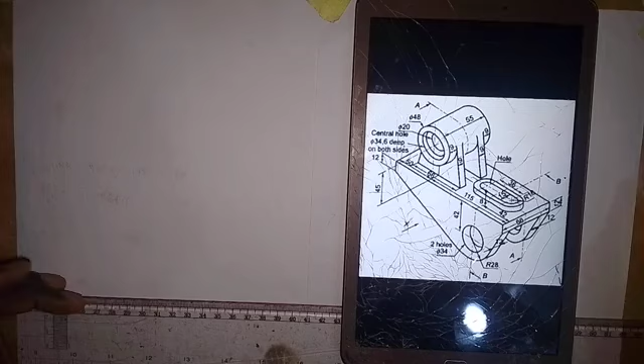Welcome to my channel. Here we are going to be working on this bracket as we draw the orthographic views in first angle projection with the front elevation in the direction of arrow X.

So after the orthographic views in first angle projection, we are going to have a video for the sectional view with cutting plane AA in this direction, as you can see it here. Then we also draw that of cutting plane BB in the direction of this cutting plane BB.

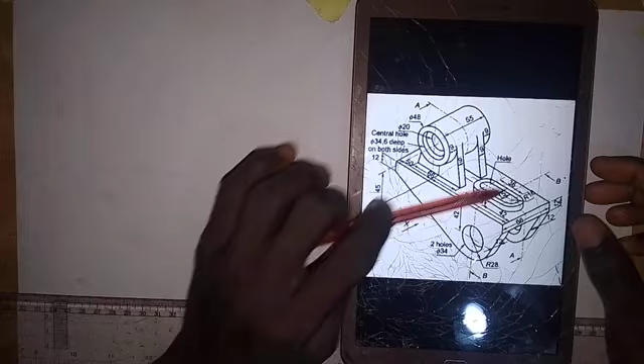So for the front elevation, the object is being viewed in the direction of arrow X. We are going to see this surface, then this surface, then the whole of this surface as we have it here.

So we are going to start with the construction of this surface. Let's talk about the dimensions that we have on this surface.

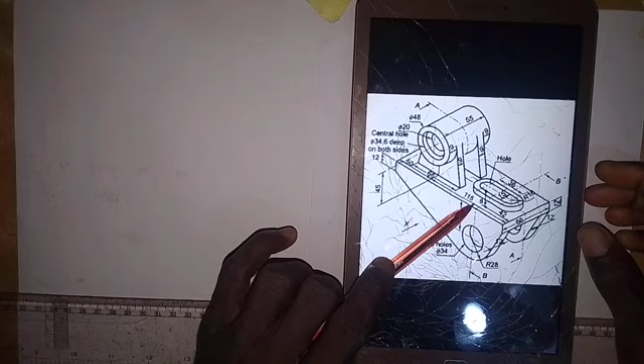We have that the distance from here to here is 12 millimeters, and the same applies to this, from here to here is 12 millimeters. Then we have that the distance from this point to this point is an addition of 50 plus 115 millimeters.

This 50 millimeters from here to this point is for us to locate the center of this part. Then we have to take a measurement of 115 from here to this end.

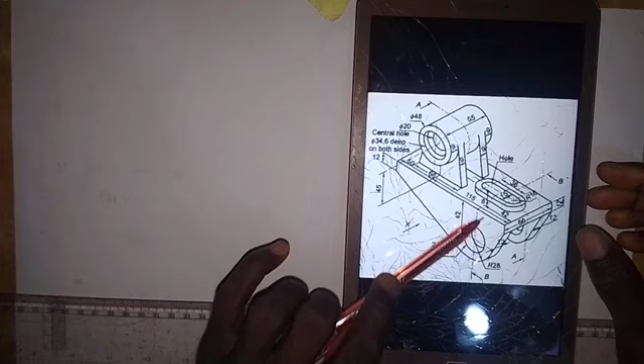We also have that for us to get the vertical center line of these circles here, we will take a measurement of 42 from this end to this point, and for the horizontal center line, we will take a measurement of 42 millimeters down.

The diameter of this circle here is 34 millimeters, while the radius of this arc is 28 millimeters. So that is where we are going to start from. We are going to construct this face first.

Let's start. The first thing that we are going to do is to draw this line up here. So we are going to draw the line first. That is the first thing that we are going to do.

I will come up like this, and then draw a horizontal line on this line, and then on the paper. Then I'm going to draw a short vertical line at this end here, a short vertical line like this.

Okay, then I will take a measurement of 50 millimeters. So this is 50 millimeters here.

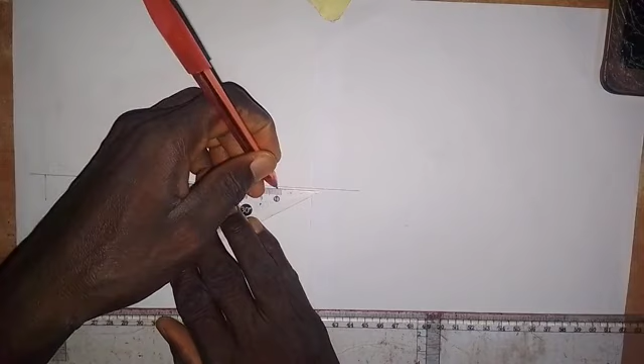Then from here I will take a measurement of 115 millimeters. So this is at 100 millimeters, then I need an additional 15 millimeters to this. So this is 15 millimeters, making 115 millimeters.

At this point also, I will draw a short vertical line at this point. So I'm going to take a measurement of 12 millimeters down, as we have the thickness there, as we see it in the diagram, to be 12 millimeters.

I will come to this end here and take a measurement of 12 millimeters down. So this is 12 millimeters here. So we have 12 millimeters.

Then the next thing that I'm going to do, as I said, is that for us to draw this circle, we need to take a measurement of 42 millimeters from this end to this point, and we take 42 millimeters down. That's how we can get that circle and the arc drawn.

So I'm going to take a measurement of 42 millimeters from this end, so 42 millimeters from this point. I will take 42 millimeters forward, so this is 42 millimeters.

Then I'm going to draw a vertical center line along this part. So I will draw a vertical center line down like this. Okay, so we have this.

Then I will take a measurement of 42 millimeters down on this vertical center line. So this is 42 millimeters. Then I'm going to draw a horizontal center line, so like this. Alright, so we have this now.

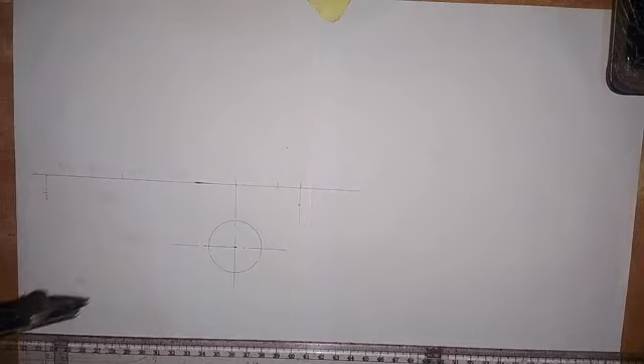So then for the arc, the radius of the arc is 28. So the radius is what we are given there. So we take 28 millimeters. So this is 28 millimeters here. So I put the pinpoint here and I will draw an arc like this. I'll just stop it here like this for now.

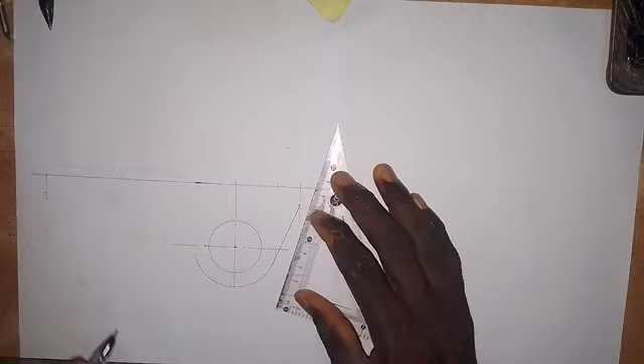So if I need to make it thick, I'll do that. So what I need to do now is join a point on this arc to this point where we have that 12. So I will join these 2 points together like this. Then there's a point here that I need to join together with this point.

So I'm going to use this set square to connect these 2 points together with a straight line. So set the set square or the ruler and join this point together. The point is on the circle, just move like this. Okay, so join these 2 points together.

So we may need to clean this. If you have used a pencil, I will have cleaned this one. Okay, so we are done with this surface that we have here.

So I can make this line a thick line at once. So let me make it a thick line. From here to this end, we make it a thick line like this. All right, and then I also need to make this line. So this short line, I'll make it a thick line like this, and I'll also make this a thick line, like this. Okay, so we have this for now.

So now let's go and see the next thing that we are to do. All right, the next thing that we are going to do is to work on this face here.

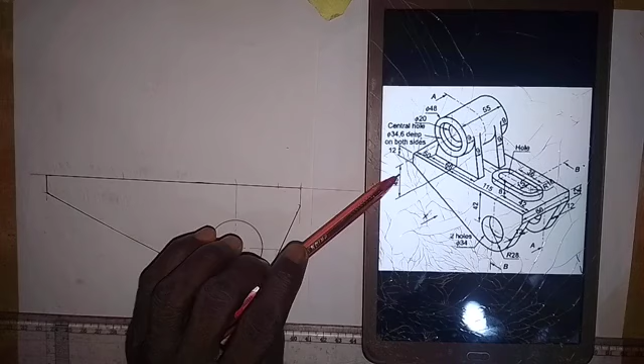So first of all, we need to get the center, which is 50 millimeters from this end, and we have already taken that measurement of 50 millimeters. Then we have the distance from here to here is 66 millimeters, and the center of these circles from this line is 45 millimeters, and the diameter of this big circle here is 48 millimeters.

Also, the diameter of this circle is 34 millimeters, while the diameter of this small circle inside all that we have here is 20 millimeters. So we are going to produce this face here on this object. So let's see how it goes.

All right, so we need to draw a vertical center line here. So we draw a vertical center line, as we have taken that 50. So this is the vertical center line here as we have it here.

All right, so then I'm going to take a measurement of 45 millimeters up. So this is 45 millimeters. Along this point, I'm going to draw a horizontal center line for us to produce the circles. So we draw a horizontal center line.

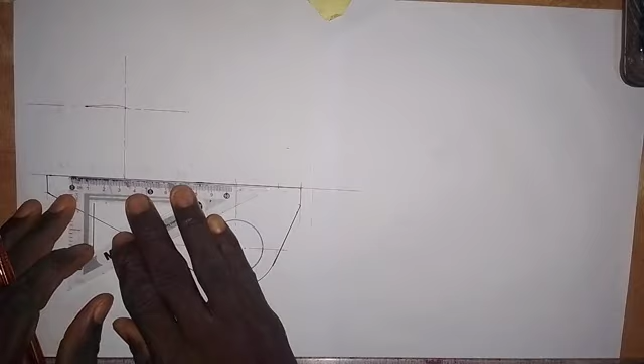And before that, the 66 that we have, we are going to divide it by 2. So I divide 66 by 2, that will give us 33 millimeters. So here we have from this point, we take 33 millimeters to the left side. So this is 33, and I will take 33 millimeters to the right side. This is 33, making 66. So let's stop that for now.

So what we are going to do now is take the measurement of 48 divided by 2 for the big circle, and that will give us 24. So we take a measurement of 24 millimeters. So this is 24 millimeters here. So we put the pinpoint at this point here, and then we draw a circle, radius 24 millimeters and diameter 48 millimeters. So we draw this circle, as I've done it here.

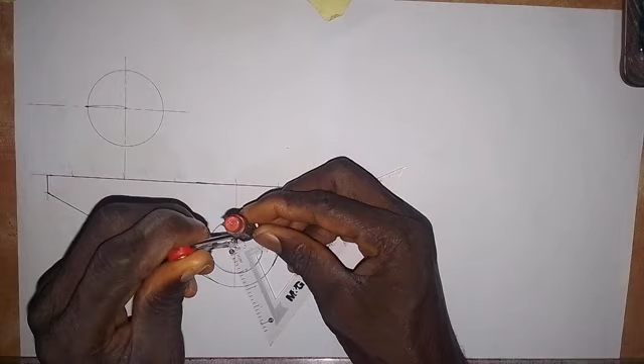So the next thing that we are going to do, the one of diameter 34 millimeters, we divide that by 2, and we have 17 millimeters. Take a measurement of 17 millimeters for the circle that follows this one. So we take 17 millimeters. So this is 17 millimeters here. So we put in the pinpoint here and we draw the circle. So it goes like this.

All right, so we have the circle in place. So I need to...

All right, so we have the circle. Then the next one, we have the one of radius 10, diameter 20 millimeters, radius 10. So we take 10 millimeters, this is 10 millimeters. Putting the pinpoint here, we go on and draw the circle gently, since the radius is small. So we draw the circle gently.

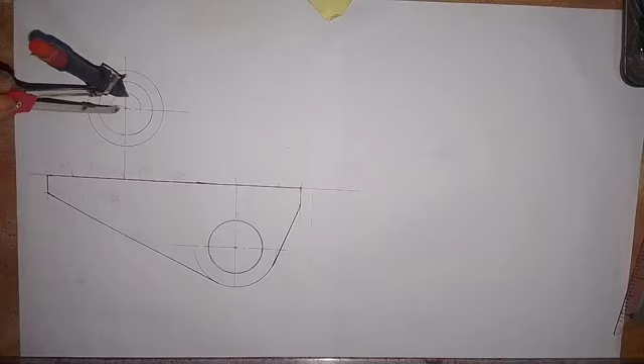All right, so we draw the circle. So we have the circle in place. So those are the three circles that we have here.

Okay, so the next thing we are going to do is join this point together with this big circle. We also join this point together with this big circle, and it goes like this. We make it a thick line at once, joining it together with a point on this circle, like this.

Okay, and on this side we also do the same thing, joining this point together with a point on the big circle, so we have it like this. So this is the front elevation of that part that we have there in the bracket.

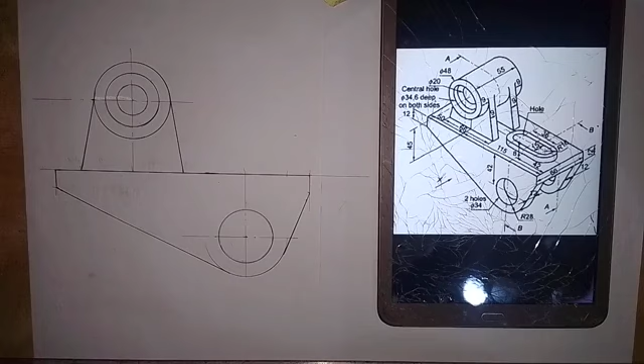So the next thing we are going to do is work on this part here to produce this surface, though it's going to be a rectangle. So the thickness from here to here is 8 millimeters, and also the center line here, we are making use of this 42 millimeters to get the center line here. Okay, and then we also have that curve.

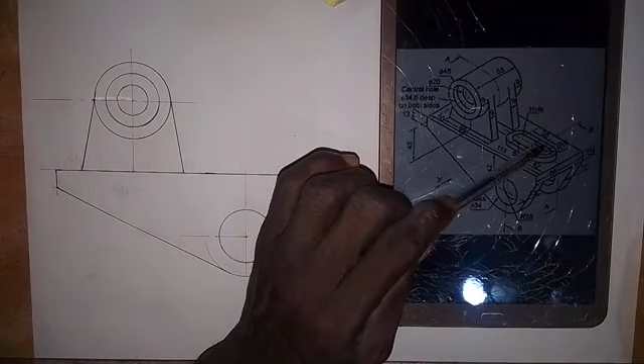So the curve that we have here, the distance from here to here is 15 millimeters, while the radius of this outer curve is 16 millimeters. Okay, so let's start and see how we are going to work that out.

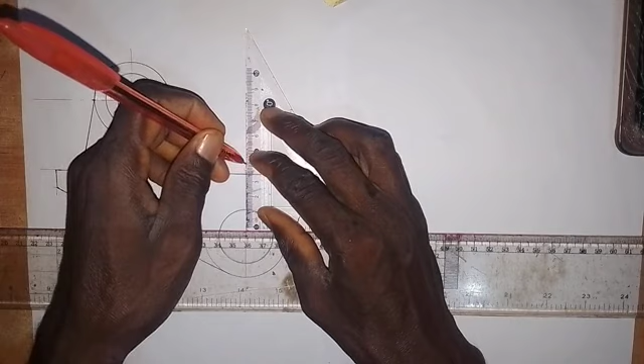So the first thing we are going to do is take this center line that we have here, this 42 that we took, and extend it a bit so we can take a distance of 8 millimeters up. So we take a measurement of 8 millimeters up, this is 8 millimeters, and then we draw a horizontal line here.

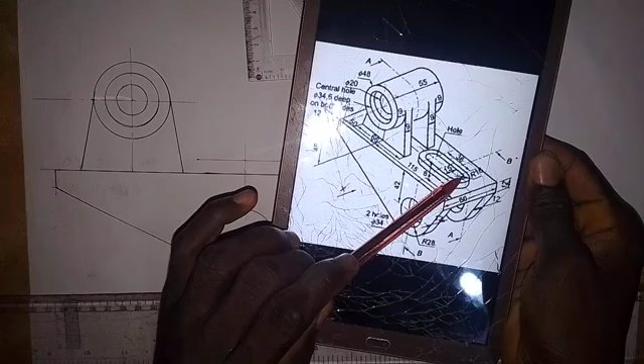So here we have the horizontal line. Okay, so from this center, which is also the same as the center of this curve here, the distance is 36 millimeters. Let's take a measurement of 36 millimeters. We divide 36 by 2, giving us 18 millimeters. So we take 18 millimeters to the left side, and 18 millimeters to the right side. So we have this now.

Okay, so the next thing we are going to do is, since the distance from here to here is 15 millimeters, the diameter of this small semicircle is 15 millimeters. So we divide that by 2, giving us 7.5.

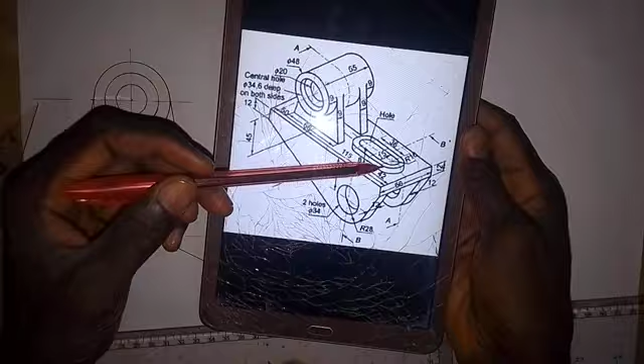So we have to take a measurement of 7.5 from this line. We take 7.5, but I will make it 8 millimeters, because with 7.5 we may not be able to get the exact length. So from here I will also take 8 millimeters to this side from this point. So this is 8 millimeters.

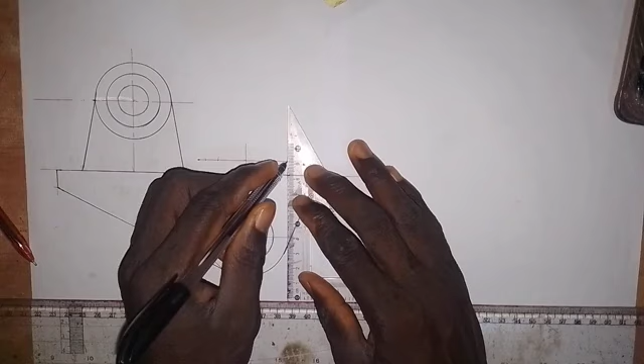So this line is going to be hidden in the front elevation, so it's going to be drawn with short dashes like this, since we can't see it in the front elevation. I will also do the same thing here, making it a short dashes line. Then the one of radius 16 millimeters, also from this center.

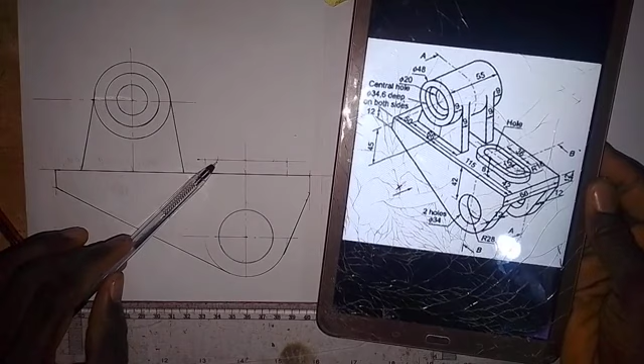So we take a measurement of 16 millimeters from this center to this side. I think I will need to extend this line a bit to the left side, and also extend this a bit. So we are going to take a measurement of 16 millimeters from this point here, and 16 millimeters from here.

Then I will also take 16 from this point to this side. So this is 16 millimeters. Now we are going to complete the rectangle.

So we are going to make this line a thick line from here down. We also do the same thing here, a thick line from here down, and then we make the whole of this a thick line all to this end, from this point to this end here. So now we have the front elevation in place, as you can see it here.

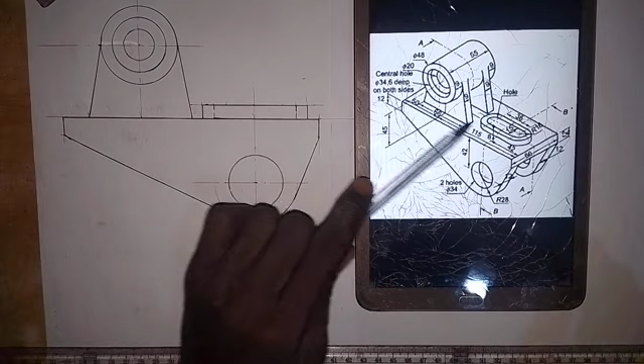Now let's work on the plan. So what we are going to see here for the plan, we have this surface, so we are going to have this rectangle. And then we are going to see this surface, and then this part, we are going to see it.

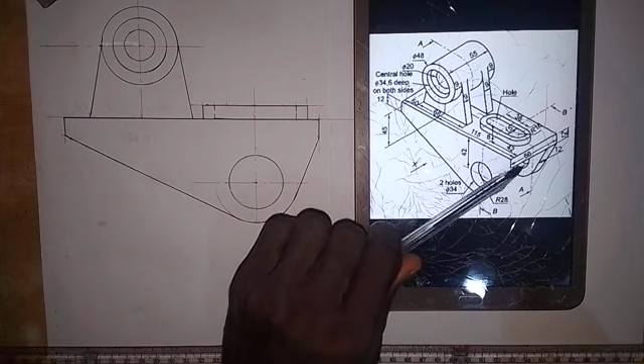So we are going to see this part, and then this cylindrical part, though the circles that we have in it will be hidden from us, so we have to take that into consideration. Also these circles here will be hidden. We also have one within this that will be hidden from us. So there will be a line at this point that will be hidden, and also at this point that will be hidden from us. So we have the length from here to here is 66 millimeters.

So let's work on that. First of all, we come down a little bit from the front elevation, and we draw a horizontal line to this side. Having drawn the horizontal line, the next thing we are going to do is project lines. I will make use of what we have here.

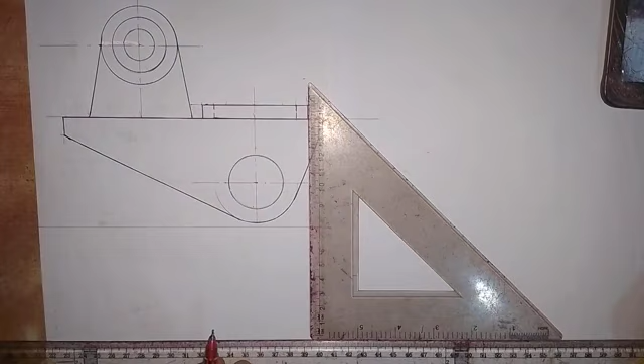From this point, I'm going to draw a vertical line down. Then I will also come to this point here and draw a vertical line down. So I will come to this point here and draw a vertical line down. Okay, so that will make our work easier.

Then I will come to this point and draw a vertical line. At this point also, I will draw a vertical line down. This center line I need to extend a bit, so it comes down like this. So coming to this point also, I will draw a vertical line down. At this point, I will also draw a vertical line. At the center here, I will draw a vertical center line down.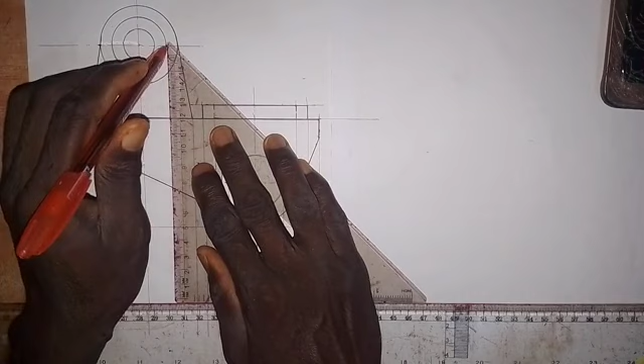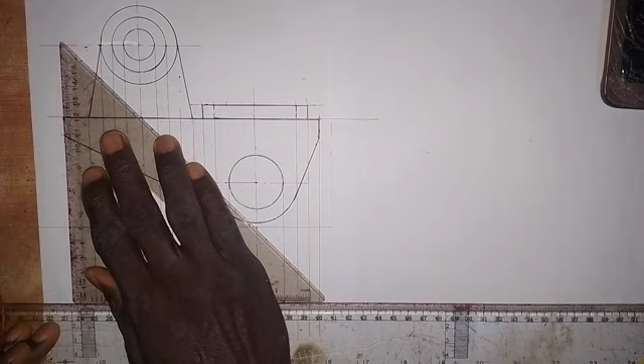Also coming to this point up here, I will just need to take my set square up and draw a vertical line down here. From this circle also, I will draw a vertical line down. So from this point on this circle, I will also draw a vertical line. Coming to this side, I will do the same thing, draw a vertical line down. So at this point on this circle, I will draw a vertical line. So at this point on this big circle, I will draw a vertical line. Then at this point, I will also draw a vertical line here. And coming to this end, I will draw a vertical line. So this will make the work faster and easier.

Then I'm going to take a measurement of 66 millimeters here, so this is 66 millimeters at this point. Okay, so here I'm going to draw a horizontal line to this end.

So I will need to extend this line to touch this, and for this I will also extend it. Okay, so this, I'll draw this, and then I'll draw this line. So draw this line.

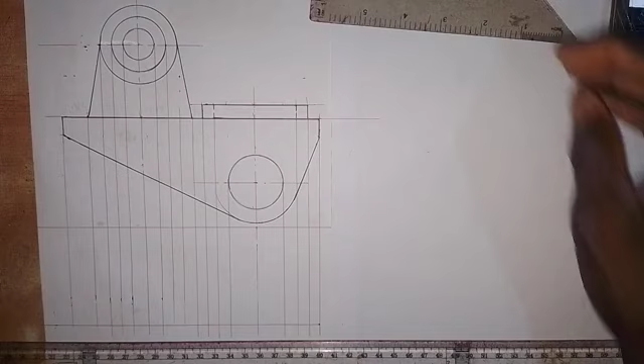Okay, all right. So now what we have to do is work out some things. The first thing I'm going to do is, for the rectangle, we are going to have all its edges drawn thick. So we make the rectangle, and we draw all its edges to be a thick line.

Okay, so I will also make this line a thick line, from here to this end. So we have this, and then this line we also make a thick line from here to this end, and then I will do the same thing here also, from here to this end.

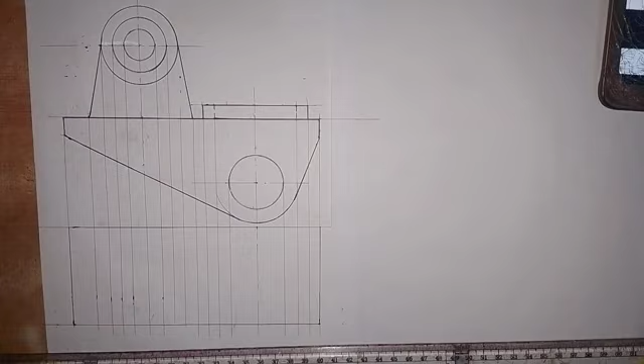The next thing I'm going to do here is work on the hidden part, which is this point. So this will be hidden. There's a line here that goes down, it will be hidden, and also we have the same thing here.

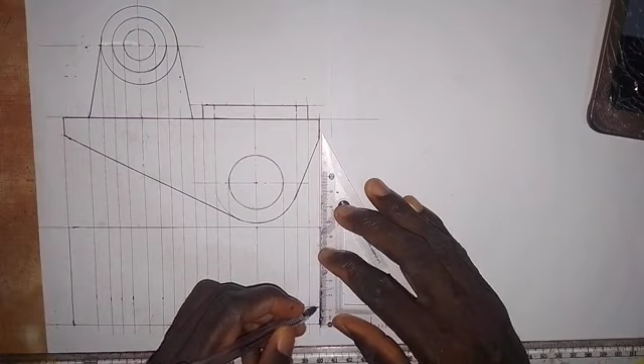So the thickness is also 12 millimeters. I'm going to take a measurement of 12 millimeters up here. So 12 millimeters here, this is 12 millimeters. Then I will come to this end and take 12 millimeters up. This is 12 millimeters, so I will come like this with my T-square.

Now we draw. So I will draw this with short dashes line, since it is hidden. I will draw the short dashes line to the end. So I'll pause the video while I do that.

Alright, the next thing we are going to do is, this hole is hidden within this part, and it's also hidden within this part. So this hole, we have it within here, and also for this one we have it within here.

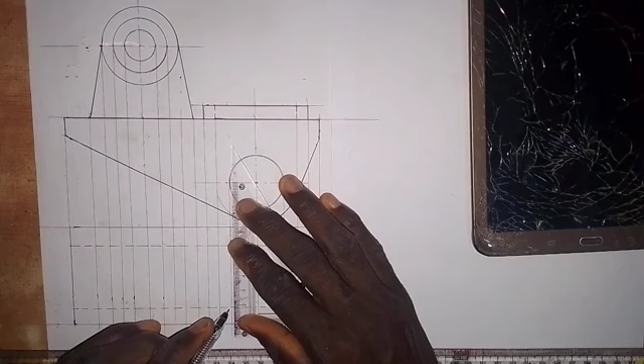So we are going to draw this with short dashes line, here. Okay, so I just put 2. So I will do the same thing here like this. So we also have for this, we draw with short dashes line, and the same applies to this, we also draw with short dashes line.

Alright, so we have this now. Okay, so the next thing we are going to do here is work on this part that we have here. We are going to see the hole of this. So we need to locate the midpoint.

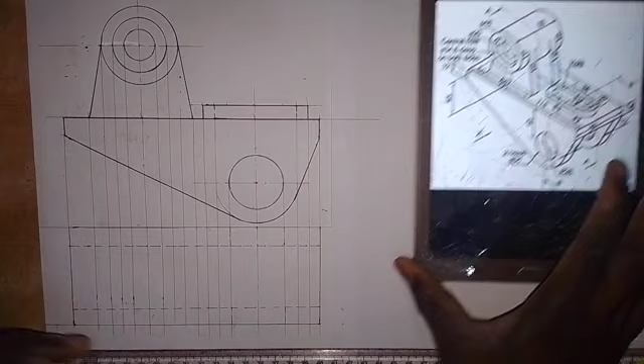So we divide 66 by 2, and that gives us 33. So we take a measurement of 33 millimeters, this is 33 millimeters here. So I'm going to draw a horizontal center line, from here, so it goes like this. Alright, so we have this now.

So the next thing I'm going to do, we are going to see the curve, and also we have the straight line. So for the curve, what I'm going to do is, so we have the big curve. From this center, I need to draw a vertical line from the center. So this is their center, and this also their center.

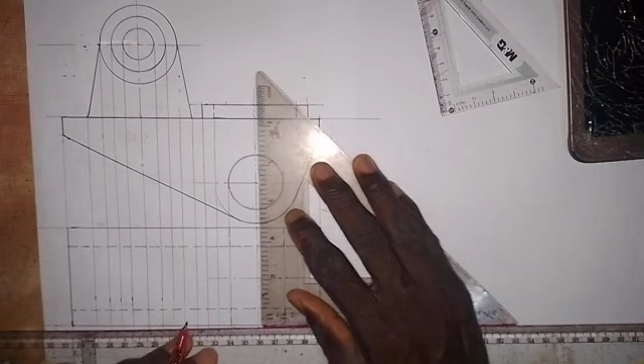So I need to draw, I will just mark it, I will not draw it all down. I'll just mark it here on this line. So this is where we have the center. And then for here, I will also come here and mark it here. So we have this, this is center on this side.

So I'm going to take the compass, put the pinpoint here at this point. Okay, so I'll put it here, and I will draw an arc, a semicircle.

Alright, so we took that 16 from this line, so I need to draw this line. I'll draw it as a center line, because when we draw that semicircle, it must touch this line. So the same thing on this side, it must touch this line. So we have this.

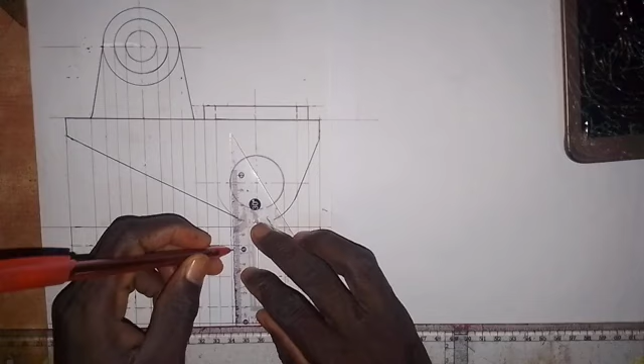So I'm going to put the pinpoint here, and then I will extend to this point and draw the big semicircle, so which goes like this.

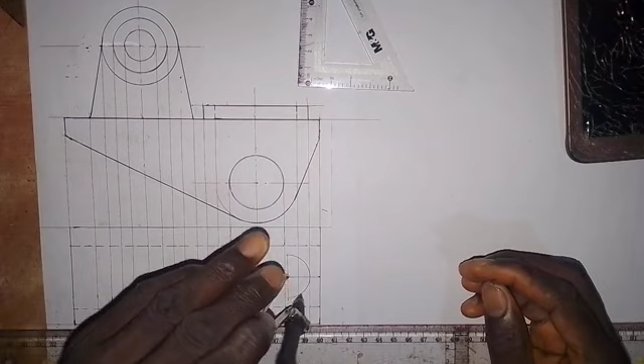Alright, so we have the big semicircle on this side like this. Then I will draw the small one. So for that one I need to take it easy, because the radius is small, so I'll just turn like this.

Okay, so we have this. Then I will turn it to this side, so we have this. Then coming to this point here, so here also I will draw from here to this side for the small one.

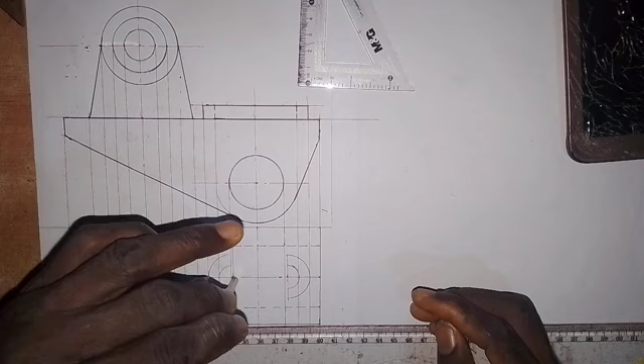Now we also do the same thing here, so very carefully. Then I will draw the big one from here, so the big semicircle. I will extend the compass to this point, and turn it to this side, and also turn this one to this side here. So we have this to touch this line. Alright, so we have this now.

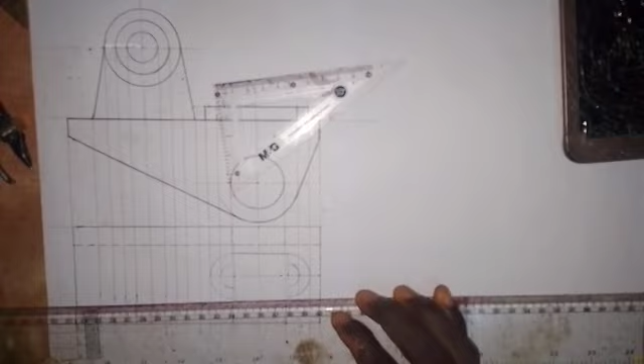So what I need to do now is join these points together. So draw a straight line to connect them, and here also I'll do the same thing, drawing a straight line to connect them together.

Alright, so we have this. We also need to draw a line from here to connect these two points together, and we also connect these two points together with a straight line, as we see it in the given figure. Alright, so that is done. Let's look at the next thing that we are going to do here.

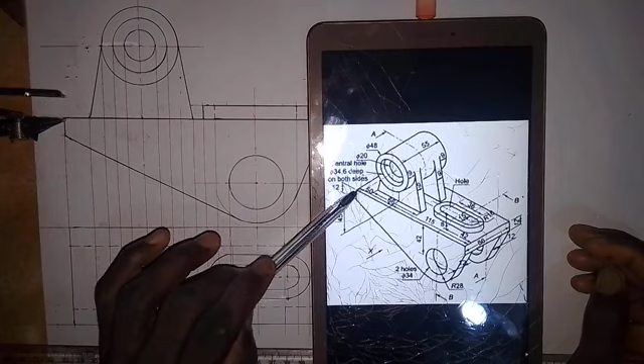So with the plan, for this part that we have here, the next thing we are going to do, we need to take note of the depth for us to draw this. We have that this is 6 millimeters deep, and then the length from here to here is 55 millimeters.

We also need to take note of this distance from here to here. So that 55 we are going to divide into two, and before that we need to extend this horizontal center line to this end so that we can take the measurement we need. So first, 55 by 2, that will give us 27.5.

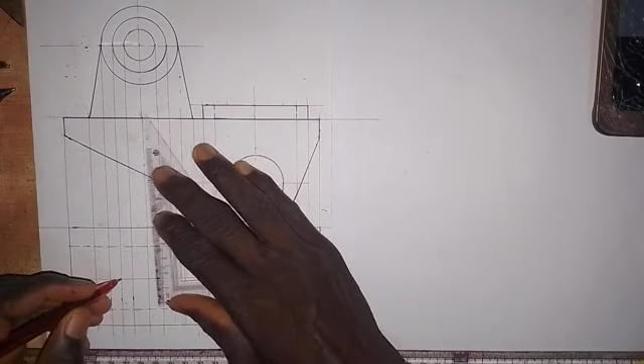So we take a measurement of 27.5, but I will make it 28 millimeters. From this center I will take 28 millimeters down, so this is 28 millimeters here. And from here, we also take a measurement of 28 millimeters, so this is 28 millimeters here.

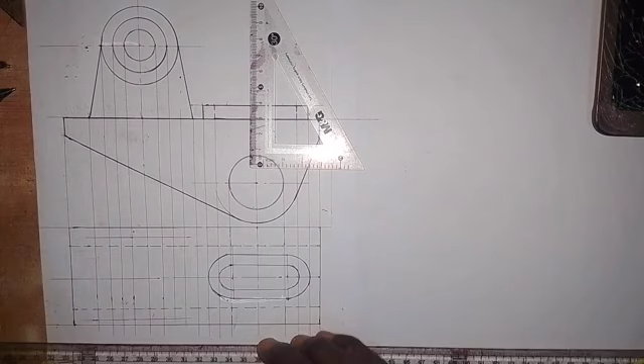So at this point I'm going to draw a horizontal line, from here to this side. And coming here also, I will draw a horizontal line from here to here. Okay, so we have this now. That distance we have taken is going to represent the end of the object. Let me show you what that length represents, this line, this part, and to represent this part on this side.

Then the next thing we are going to do is take a measurement of 6 millimeters inward, for the depth of this one, this one is 6 millimeters in the bigger one. So we take 6 millimeters inward, so this is the 6 millimeters. Looking at it, it falls... okay, I have the 6 millimeters here, this is 6 millimeters. So I will also come here and take 6 millimeters inward.

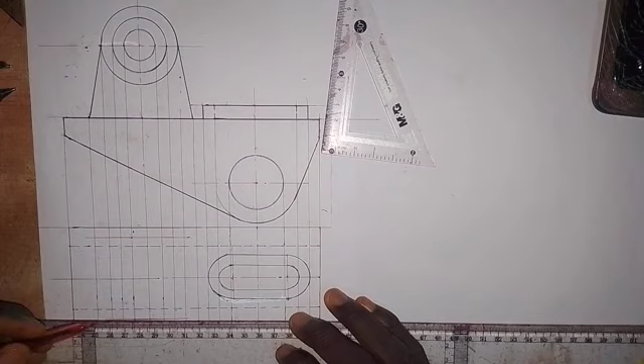So looking at what I have here, it falls within this line, so I'll just use this line as that 6 millimeters in. So that is what I'm going to do. Okay, this line is not straight. Alright, so we have that, so that's what I'm going to do.

So for this line, we are going to see this line as a thick line, so it will be a thick line, from here to this end, like this. And then we also make it a thick line from here to this end here. Alright, so we have this now. So then we are going to make this line a thick line from here to here, and this also will be a thick line, from this point to this point here. Alright, so we have this.

So the other thing we have here, this part will be hidden for this one. So we have it at the front drawn with short dashes line. I'll also draw this with short dashes line. We have the same thing here, drawn with short dashes line. We also have it here drawn with short dashes line - that is its edge.

While this inner one will be hidden completely. From this point we produce a short dashes line to this end, and we also have the same thing here. From this point we produce a short dashes line all to this end here.

So what other thing do we have there? We have this part. We are taking a measurement of 9 millimeters from this point inward. So this is 9 millimeters here. The thickness of that part is a web, and the thickness of that web is 9 millimeters again.

We also take 9 millimeters from this point, forward here - so this is 9 millimeters. We do the same thing on this side, taking 9 millimeters inward - this is 9 millimeters.

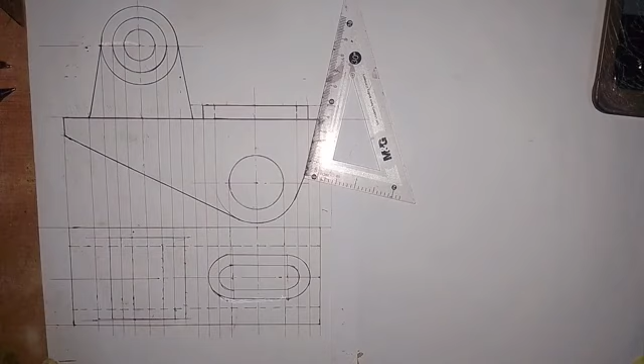So from this point here, we make this line a thick line from here to here. We also make this the same on this side - from here to here we make this a thick line, and we come to this point and also draw the line like this for the web.

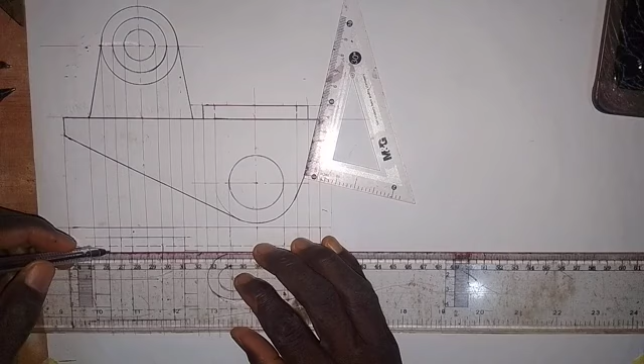I will come to this side and do the same thing - draw the line here like this, and draw it here also. Then I will come here, draw the line like this, and here also I will draw the line. This is how we are going to have it.

Also part of what we have here - there is a line at this point that is hidden, the same here, and also for this part. We need to join this together, making it a short dashes line since it is hidden from us when looking at it from the top. So make this line short dashes line to this point.

We also join this together, making it a short dashes line from here to this end. Then we also come here and do the same thing - on this side, make a short dashes line to this end.

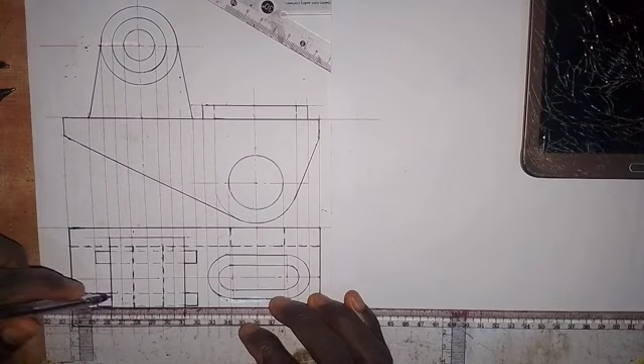Then coming here we also do the same thing, making this a short dashes line to this end here. So we have this - this is the plan. This is how it will look.

Let's work on the right hand elevation of this object. We are looking at it in this direction, and we are going to see this face here - it's going to give us a rectangle. We see this rectangle, and this will give us a rectangle too, and we also see this one as a rectangle altogether with this.

So what we are going to do to make the work easy for ourselves is to project from the front elevation. I will come to this point, and from here I'm going to draw a line.

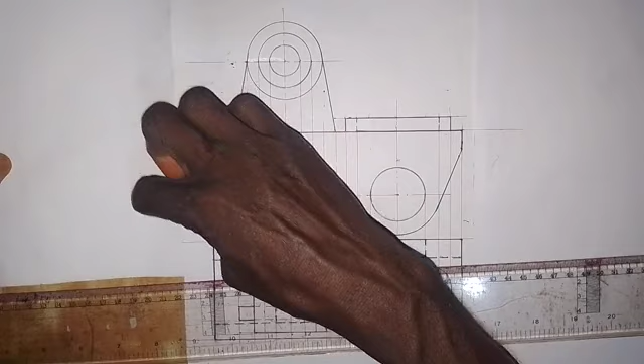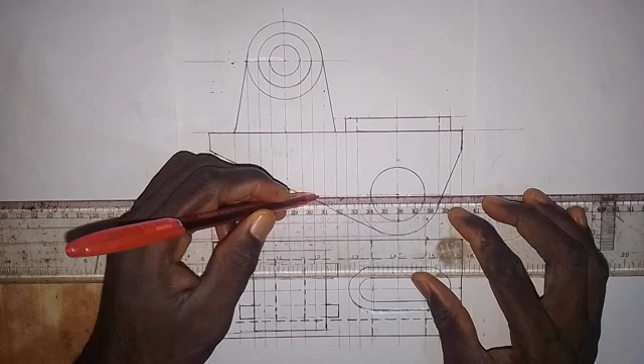From this point I will draw a horizontal line from this point to the left side. Then also from this point I will draw a horizontal line from here to this side, extending this center line to the left side like this. Then from this point I will draw a horizontal line to this side, and at this point I will also draw a horizontal line to this side.

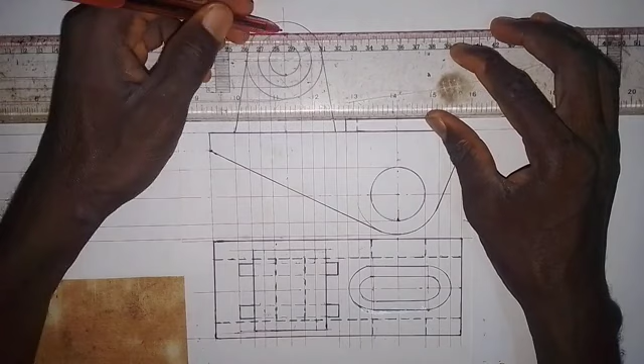At this point I will draw a horizontal line to this side, and at this point up here on this part I will draw a horizontal line to this side. Coming to this point, I will draw a horizontal line to this side. This point I will also draw a horizontal line to this side, and from here I will draw a horizontal line from here to this side. The same thing here, horizontal line to this side, and then at this point here I will draw a horizontal line to this side. Alright, so we can easily produce the end elevation.

So what I'm going to do here is draw a center line. So here I will draw a center line like this.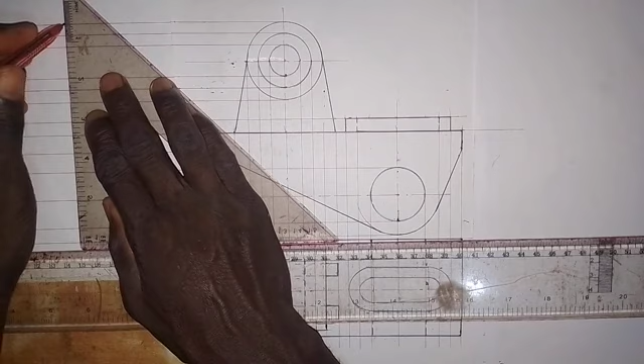So then coming from this center line, from this center, we take the total length as we have in the front elevation, for the end elevation. We have the distance from here to here is 66 millimeters. So from the center, I'm going to take a measurement of 33 millimeters to the left side and 33 millimeters to the right side, making it 66 millimeters. So we have this.

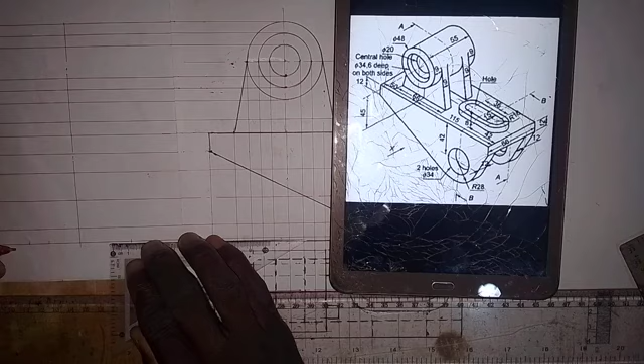Now for this part that we have down here, I'm going to take a measurement. The thickness is 12 millimeters as given to us. So I'll take 12 millimeters from this point inward, and here also I'll take 12 millimeters inward.

So I'm going to draw a vertical line, about 12 millimeters inward, from here to this point, touching this line like this.

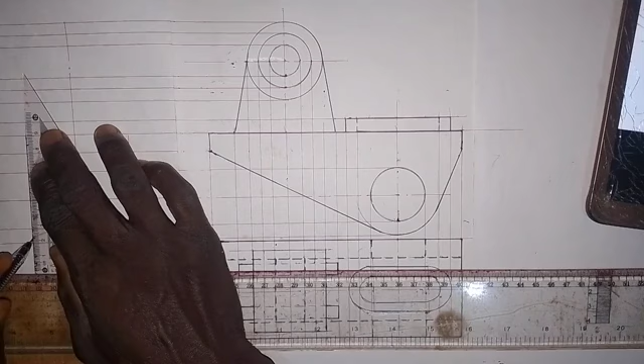And also I will come to this end and draw a vertical line to touch this line. I should have made it a thick line at once, so this will be a thick line down here, and this will also be a thick line down here.

And then from this point I will draw a vertical line to touch this line, and I will also do the same thing here, drawing a vertical line to touch this line. So for the rectangle, we make this a rectangle from here to this end, and then coming here, we also draw it as a rectangle.

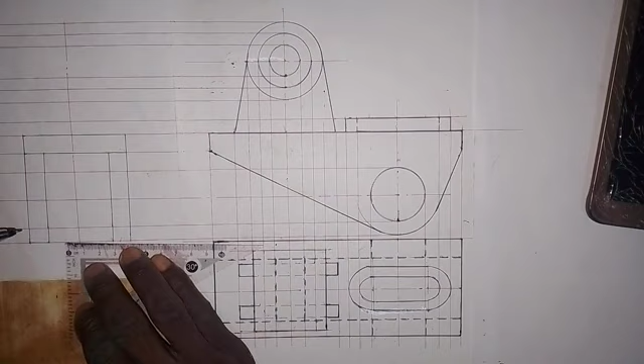So coming down here, I'll also make this a thick line like this, and I will make this also a thick line to this end. So this particular hole will be hidden from us, and it is within this part.

So we draw this with a short dashes line like this. We also do the same thing here with a short dashes line. If I come up here, I will also do the same thing, drawing with a short dashes line. The same thing applies to this one - we draw with a short dashes line. Alright, so that is done.

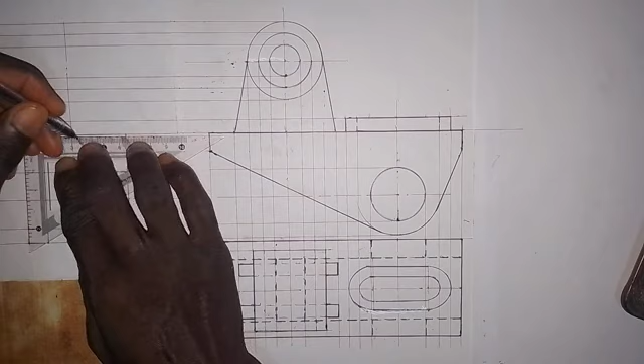So now we have this part here, which is going to give us a rectangle. The total distance, as we have here - if the radius of this one is 16, it means that from the center to this end is 16, and from here to here is also 16, making 32. But we just take a measurement of 16 millimeters from this point - 16 millimeters to the left side and 16 millimeters to the right side. So we have this. At this point, I'm going to draw this as a vertical line.

So here I will draw this as a vertical line like this. So we have this, and we also have this. So this line now, we make it a thick line like this.

And then for the inner one, we are to take a measurement of 8 millimeters inward. So this is 8 millimeters here, and also from this point we take 8 millimeters inward, and then I'm going to draw this as a short dashes line.

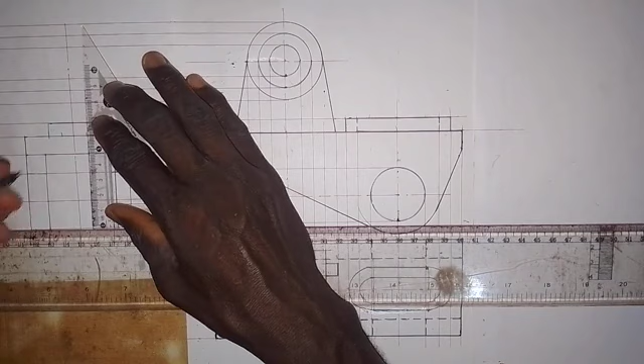Okay, and I will also draw this as a short dashes line, because that part will be hidden. So other thing that we have here is to work on this part here.

So as we have here, on the top, so the length, as we have it here, with 55 for the length. Let me bring the object for you to see. Okay, so we have that the length from here to here is 55 millimeters.

So we are going to see it as a rectangle. So 55, so by that's 27.5. So I took 28 down here.

I will also take 28 here. So at this point I take 28 to this side. This is 28 millimeters, and here also I will take 28 millimeters. So this is 28 millimeters here.

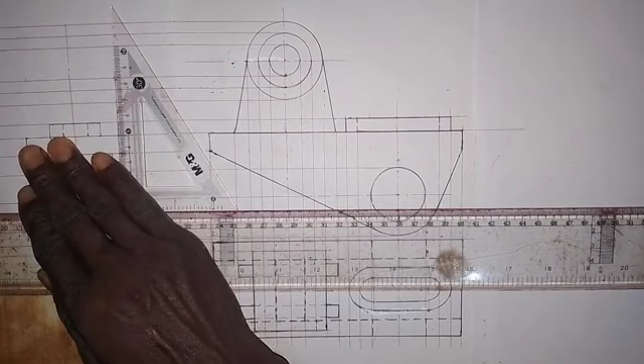So at this point I'm going to draw a vertical line. So it's going to be a thick line all through. So we make it a thick line, so we draw like this, okay. And then coming to this end, we also draw like this. So we have this now.

So this line will be a thick line up here like this. Then before I work on this, this hole will be hidden from us. So we make this one short dashes line like this. Make it short dashes line to this end, and we also have the same thing here, so make it short dashes line.

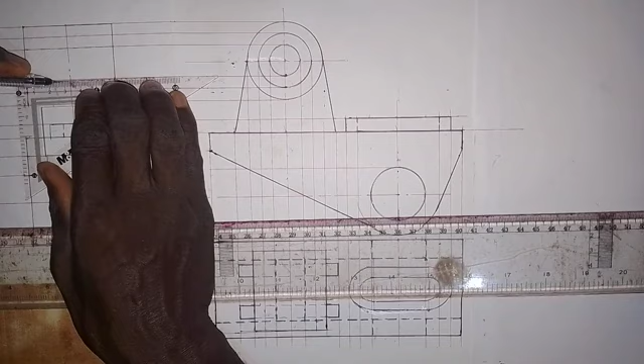All right, so for the center line we need to extend it. So we extend the center line, and it goes like this. All right, so that's the center line as we have it there.

So other thing that we have to do here is to draw the elevation of the web. So for the web we need to draw it. As we have here, we will take a measurement of 9 millimeters inward, and then this one is 9. So we do the same thing on both sides.

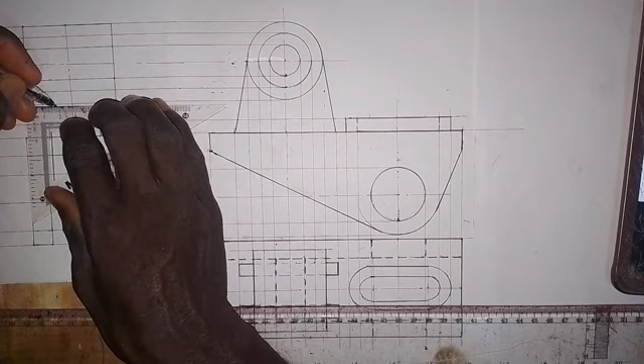So I will come on this line and take 9 millimeters in. This is 9 millimeters here, and I will take 9 millimeters again, making it 18. Okay, so do the same thing on this side. I will take 9 millimeters in, then another 9 millimeters in here.

So we have this, so I'm going to draw this. It will be a thick line. So from here down, be a thick line, and then for this one, also be a thick line.

And then around this part it will be hidden, okay. So we have it like this, and also this will be thick going down, and then on this part it will be hidden, and then we also make this a thick line. But it goes beyond this, it goes up beyond this, so it goes up to around the center.

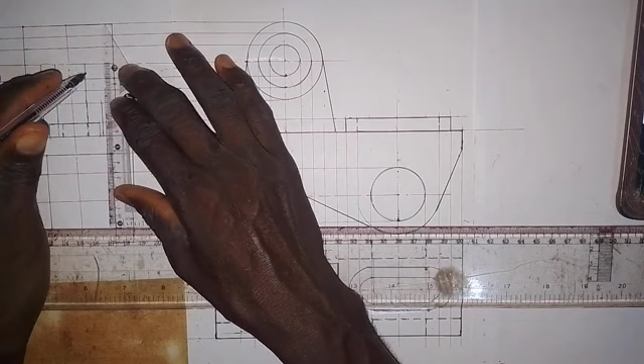So I'm going to make this a thick line, and making this a thick line down here. Do the same thing on this side. Making this a thick line, and making this also a thick line to this end. Then we are going to have a little curve, just a little curve as we see it there like this.

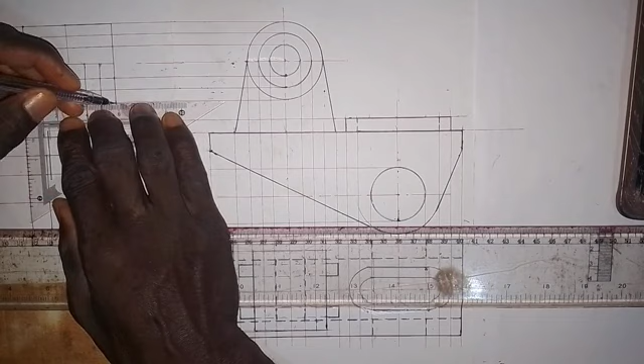Okay, so I'll just leave it like this. So then we now make this a thick line from here to this end, and a thick line here from here to this end here. And then the circle here, this particular circle, not the inner, the small one, so this one here.

So it is 6 millimeters deeper than the big one. So we take 6 millimeters here, we also take 6 millimeters here, and we draw the end of that hole, we make it short dashes line, so it goes up like this. Okay, so we also do the same thing here, so it goes up like this. So draw short dashes line, like this.

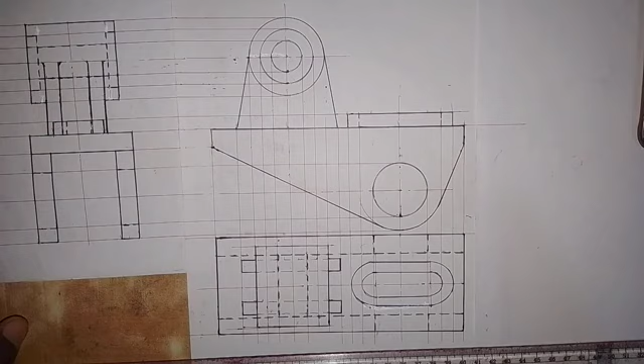Okay, so we have this now. So this is the end elevation, and as we have drawn this in first angle projection, this is actually the right end elevation. It's as simple as I've done it here. Thank you, and God bless you.